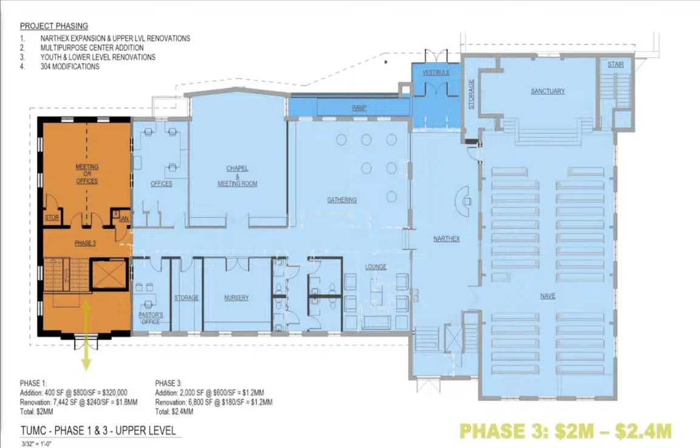So moving on to the next slide—I'm actually going to jump around a little bit. The blue was phase one. I'm going to jump over phase two now, which is that multi-purpose facility on the south side of the site, and jump over to phase three to keep inside of the building. After phase two happens, that allows for some things to shift around inside of the building to allow for phase three to happen. Phase three is that area in orange on the west side of the site that would create a new entry for TEP, that lower level, making it feel more welcoming and inviting.

Then also up here on the second floor, that addition would be 2 levels, allowing for additional meeting rooms or offices up on the second level. With that, a new elevator could be installed—a 3-stop elevator—so you can hit all 3 of those different levels, on the TEP side and the upper level, where there's that 2-foot offset. That would also provide a great entry opportunity for the office throughout the week, because the proximity of that entrance on the south side aligns right with the new opportunity for parking, which would be somewhat centralized in the site at that point. So you wouldn't be wandering around down an alley looking for the entrance—it would be something clearly annotated as a place to go if you're looking for that office access throughout the week, or the entrance to the TEP, which Brent mentioned would be much wider, more inviting, and accessible with a nice, modern, safe elevator that would get you to all the different floors.

So that was primarily the addition part. Moving on to the lower level, the rest of that phase would be renovating that lower level to expand the TEP spaces. So instead of having 1 classroom, there'd be 2.

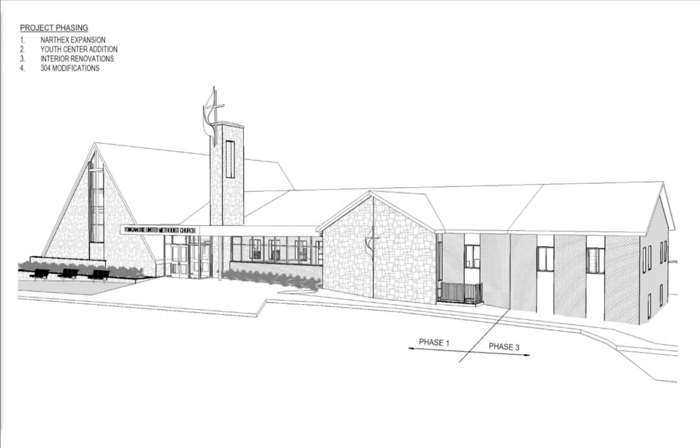But if you look over to where the bell tower is, that new addition on the north side could have a nice overhang over that entry, which would help encourage people to gather and stick around outside, especially on a nice day. It's expanding that narthex gathering area out to the north side and creating a nice little plaza area out to the front.

With that, there could be some additional seating off to the east side of the plaza, with maybe a nice donor plaza area or founder's foundation that could have donor names carved into some bricks there, creating a nice little space.

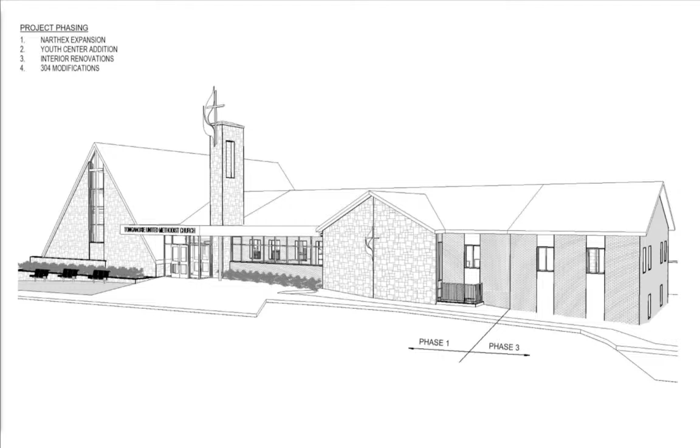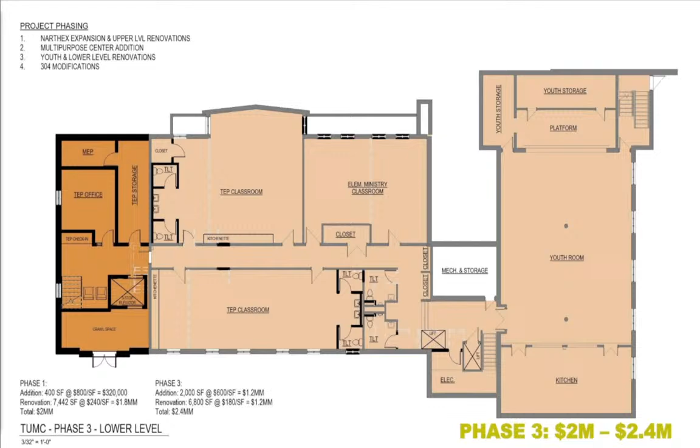So phase 2, the red one, this is what that multi-purpose building could look like. There's still a lot of flexibility on what this area is. As Pastor Matthew mentioned, this could be a larger gymnasium space to allow for the expansion of a sports ministry, and help facilitate larger banquets and events within the community. There could also be a kitchen, a meeting room, and restrooms and other support spaces to help support that new multi-purpose facility.

The idea being that it could function on its own - the church could be completely closed in the evening, and a team or group could come and use this building, self-contained within it, without needing to get back and forth into the church proper.

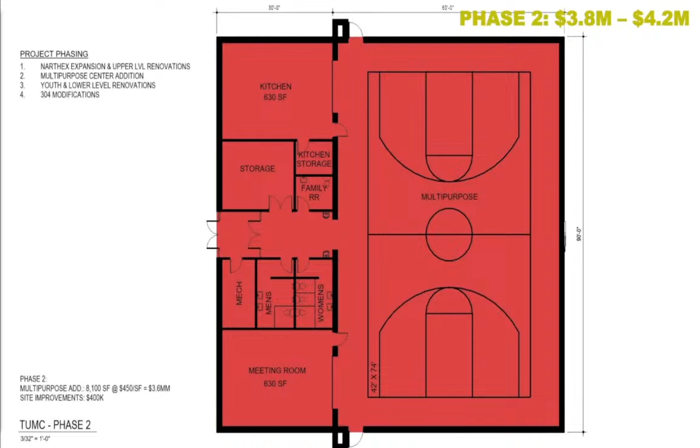Moving on to the next, just an aerial view of this space. This is still a pretty rough rendering of what it could look like - it could look completely different. Just for scale, on the south side of the site, that facility would look something to that size and nature, a bit larger to allow for basketball games to happen.

That space could also have nice amounts of glass to allow for some daylight within that space. Materials would probably look similar to what we have here on the church, but as far as the overall appearance, it could still vary drastically from what we've got shown here.

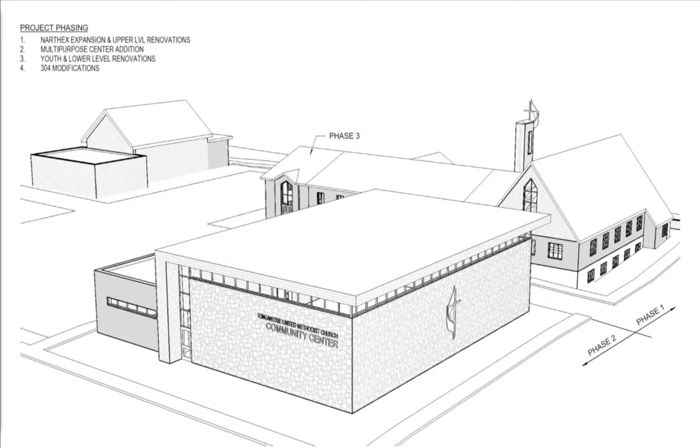So that'd be phase 2, and you can see there on the back side, phase 3 is just poking out for that new entry, which if we move to the next slide, we've got that shown a little bit better.

That area in between that phase 2 and phase 3 area would be that new parking lot area. So you have some nice parking close to that multi-purpose addition and also close in proximity to that phase 3 addition, to allow for better access into the church from that parking lot.

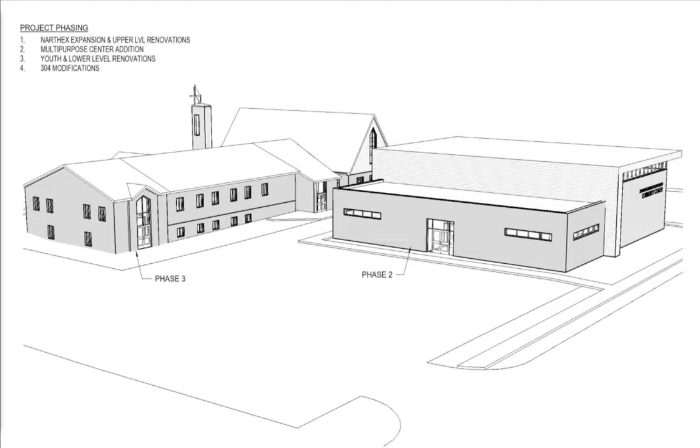And then just to recap again real quick, the area in blue, that's phase 1. Phase 2 would be the red area, the multi-purpose addition on the southeast side of the site. With that phase 2, we would have the expanded parking lot areas and the play field and playgrounds at the southwest corner of the block. Phase 3 would come in with the orange color, with the addition to the west side and renovations to the lower level, and then potential phase 4 for modifications to 304.

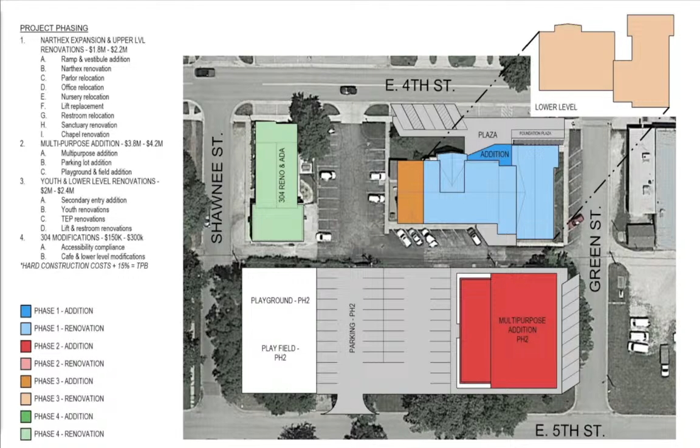So this is a conversation, and we've done all the talking so far. We'd also like to hear from you guys as to your thoughts, what your questions might be about these things. We're here and available this morning. Pastor Matthew can also field things from his side of the room, and I don't know how you want to accommodate or moderate it, but we're here for you.